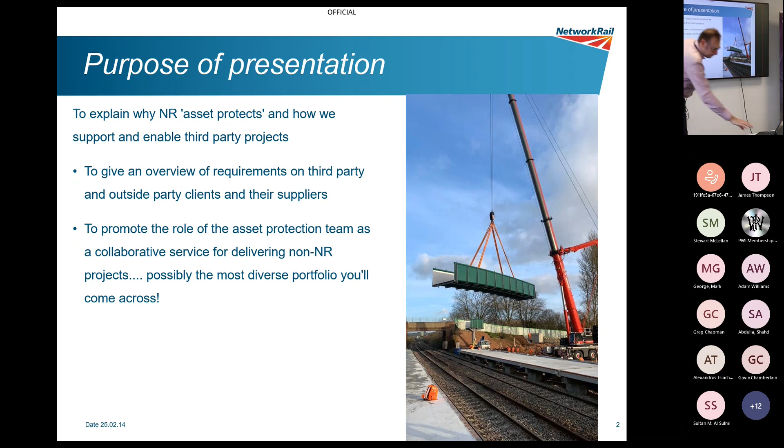So I've mentioned a couple of things already - outside parties and third parties. This gets a little bit confusing if you don't come back to some of the key principles. Outside party works are not railway projects. They're people who work alongside the railway - they're our neighbours, people who maybe want to put a bridge over the railway, a local authority, there might be somebody cutting trees down next to the railway. But the key thing is there is an impact on the railway. If anything they do goes wrong, there will be an impact on the railway - it will impact performance, potentially cause safety-related problems.

Third-party works, on the other hand, are about the creation of new railway assets or changing existing assets. Network Rail aren't delivering that work - we've got a third-party client who appoints a principal contractor, principal designer. They need to work with ASPRO to help them deliver that project, because ultimately it's our railway, we're the infrastructure manager. We need to allow them access to do the work. We need to ensure that whatever they do complies with standards, because at the end of that work it becomes a Network Rail asset, and then we're liable for maintenance, renewal, etc.

The other aspect of work the team do is managing land clearance activities. We'll touch on that in a bit, but essentially that's where Network Rail property is sold to developers to build adjacent to the railway.

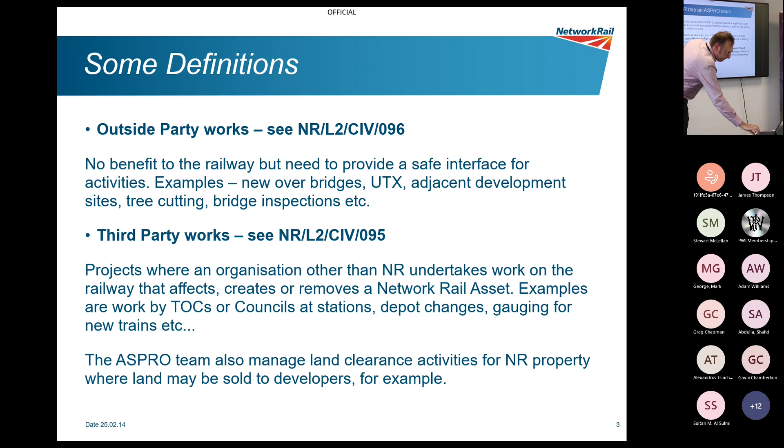So we do have legal obligations, which is why we're here - this is why ASPRO exists as a function. The Railways Act and Network Rail's licence places a legal duty on us to provide assurance that the railway is safe to use and to work within. So the Health and Safety at Work Act and CDM regs place obligations on us whenever we do construction work, and likewise, it places similar obligations on the outside parties and third parties.

And remember, the current issue of CDM regulations applies to domestic clients as well. So if you're extending your property up to the boundary of the railway, you are the client in the eyes of the law - and I don't think many clients would know that. I'm sure many of the small building companies don't realise they're a principal contractor. So that's by the by.

So asset protection, the asset is the rail infrastructure. It's valuable, millions, billions of pounds worth of assets out there. It's also a dangerous place to work. So we protect the infrastructure, things we know and love like track, signalling, electrification, etc. We're protecting the people that work on the infrastructure and the users of it, passengers, freight users, etc. And we protect the outside parties themselves. If somebody's working adjacent to the railway, we've got an obligation to make sure that they're safe.

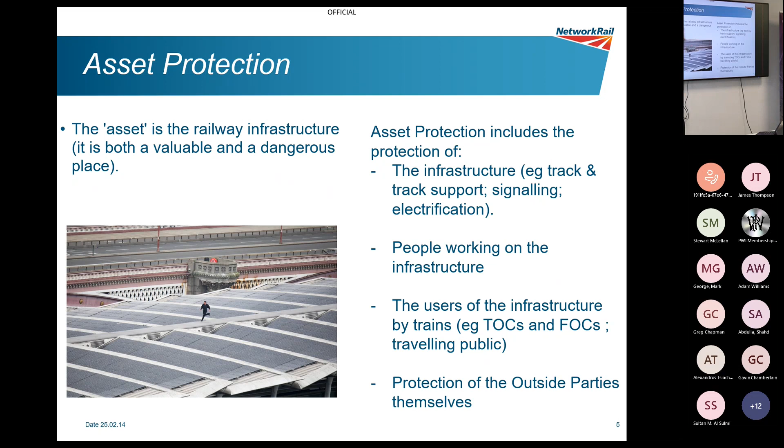Scope of ASPRO is wide and varied depending on what the project is, the complexity of it, what's been done to the infrastructure or what's been done around the infrastructure. There's a lot of words on there, I probably won't read them all. The thing you'll pick up from it is about understanding risk. That's probably priority one. What's the risks to the railway?

We assess those risks. In the case of outside parties, we help them with mitigating measures to prevent those risks from occurring. And we check the control measures are in place when they're actually doing the work. So we have safety supervision on site, maybe dropping in and out, maybe a permanent feature of the work. We work with the asset management team and other internal stakeholders, particularly on third-party works, where ultimately they become the owners of those changes to the railway.

And similar to our colleagues in capital delivery, we act as a DPE. We make sure there's system integration taking place. We check designers are coordinating their activities in the way that we would expect as Network Rail, so that the end product is as we would deliver, I guess, as a capital delivery team.

We do readiness reviews, so approaching major possessions, we'll sit with the various teams, do readiness reviews, T-8, T-4, etc., checking that they're ready to go for the possession they've got booked. And we provide protection staff to look after those sites when people are working on our infrastructure, making sure that whatever they've done is handed back safely at the possession.

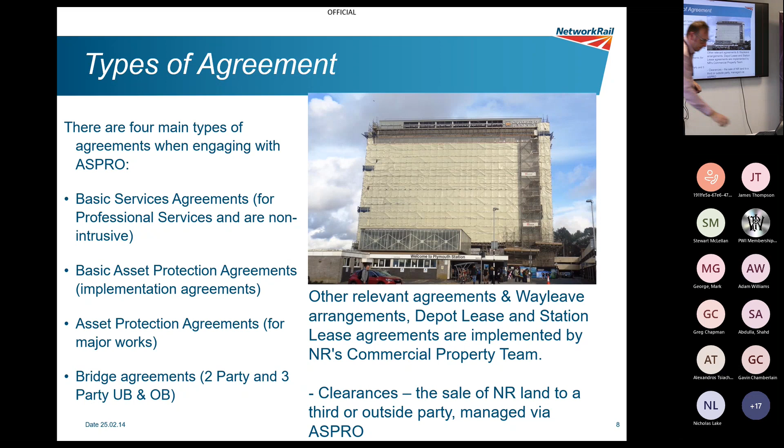The key thing with something like this - we've got other examples of piling rigs to look at in a minute - this might not be our land. The chances are it isn't if it's an outside party job. We don't know the condition of that ground, we don't know what they're sitting that crane on. So they need to demonstrate that they've made that as safe as possible. That could be ground investigation results proving the ground bearing capacity is enough to support this crane, or it could be we need to see some temporary works design so that they can create a pad for that crane to operate on. That's one quick example.

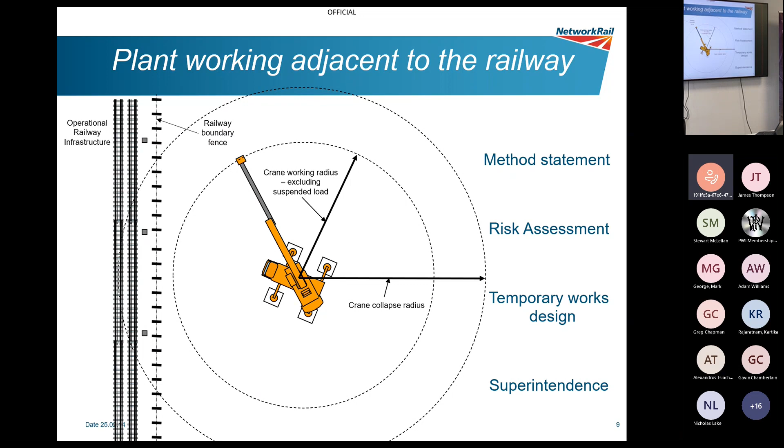So some considerations when we're using this kind of plant next to the railway: can the lift be undertaken within the collapse radius so that if it did collapse, it's not going to encroach on the railway? Can we put a slew restriction on the jib to prevent that same thing, basically making the piece of kit smaller? If you can, then great, we'll have a look at the working platform just to check that. If you can't do that, then maybe you need a possession to undertake those activities because the risk of that collapse onto the track just isn't tolerable.

And then method statements - how are you doing it, when are you doing it, what are the various crane positions that you need to be using to do that work. And that's all reviewed by our team before they're given the thumbs up to carry on. Big risk with outside party work is if they don't engage with us and we know absolutely nothing about it, and they're not taking any measures because they just haven't considered the railway.

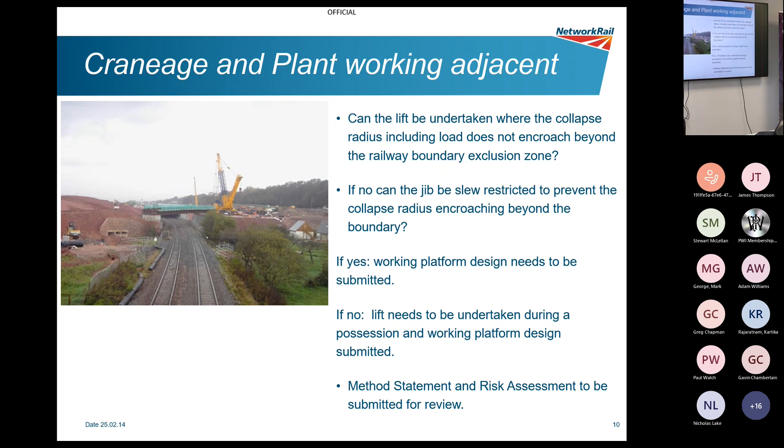That's a bigger risk because we won't know what's going on. We won't know where the risk areas are. We've got absolutely no control over any of that.

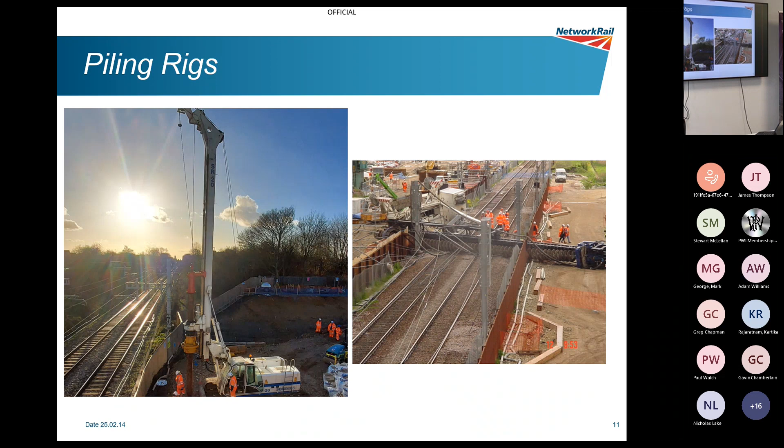Tower cranes, similar sort of risks. They're more of a permanent fixture, I would say, in a construction site. So even though they're temporary, they're probably there for a longer period than a mobile crane.

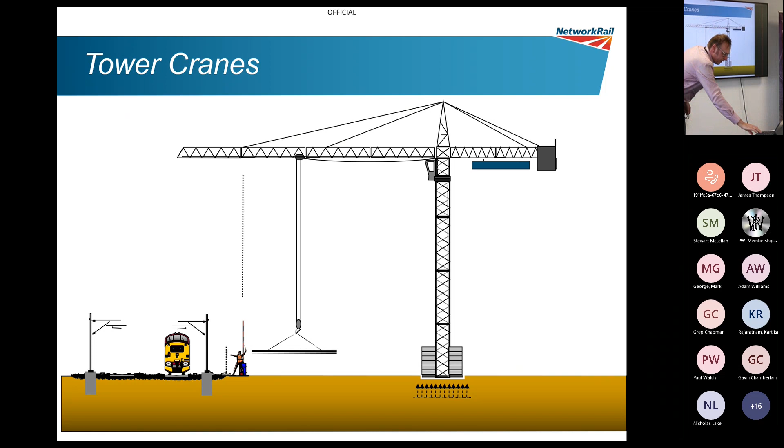Generally, moving heavy equipment higher, further. It could be a saddle crane. Still, we're considering the collapse radius, we're considering whether there's slew restrictions. Does that crane ever need to oversail the railway? There's something called a license for oversailing to manage that.

We've got a design check certificate for their foundations for this tower crane. It's semi-permanent work, so we call it. There will be a foundation design required for that. Do we need to downrate the crane to reduce the risk so it may be capable of lifting X tons? Do we say, actually, we want you to reduce that amount because we need to reduce the risk?

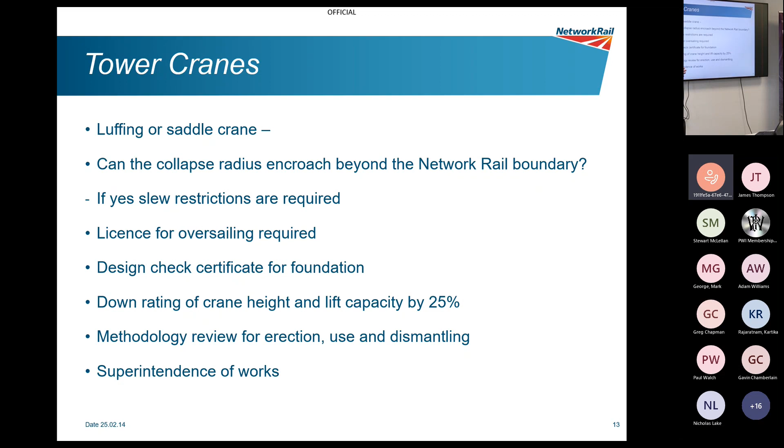We need to see how they're going to build it. Tower cranes, as you can imagine, take a while to put up. Do they need another crane to build that tower crane? We need to understand that methodology and how it's going to be dismantled. And how often do we need to be on site? Do we need permanent rail safety supervision, or are we happy to just keep it, once a week, watching brief?

Track support zone - so for most, you know, I'm a track engineer by trade, we know the track support zone. A lot of other disciplines now understand this, which is great. Especially when we were doing electrification on the main line, this was a big issue - people piling next to the track. How are we monitoring that track? How are we monitoring the settlement?

Crossrail down in London - I mean, there was a lot of monitoring took place when they were tunnelling in the Paddington station and the tracks around there. We've now got HS2, we've got Old Oak Common station being built, which I know Chris Ford spoke about a couple of weeks ago.

There's a hell of a lot of track monitoring required there. There are tunnels under our network. And in this example, you can see the work on the side, building the shaft, starts to interfere with the track support zone when it gets to a certain depth. And all of that design takes into account track support zone, it takes into account pile foundations for OLE, which could ultimately be affected by settlement as well.

But we had a recent example in Wales, where there's a construction site next to the railway. They want to do some dewatering, so they provided some figures, settlement figures. They basically think it's going to settle 15 mil. So, okay, where's the track monitoring plan? We'll monitor that and we'll react accordingly.

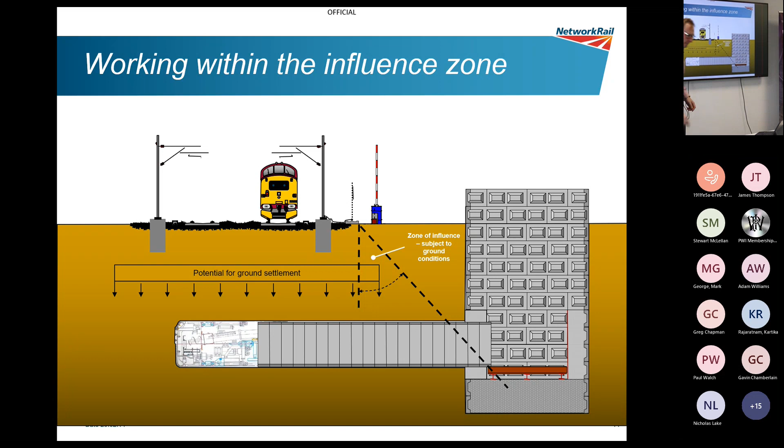Some typical examples: under track crossings, piling, retaining walls, excavations, tunnels. We need design submissions for all of those things. We need to know what they're doing under the railway. We need the settlement predictions, evidence of ground investigation, and on-call arrangements in place for when they're doing the work, so that if things start to shift, we've got a contingency plan.

The asset management plan, so all this is done through AMP, as we call it. And the track monitoring, you tailor that to the risk, depending on the expected movement.

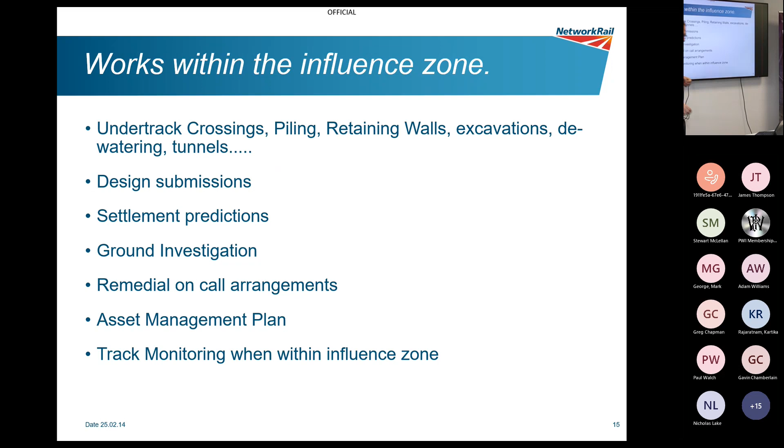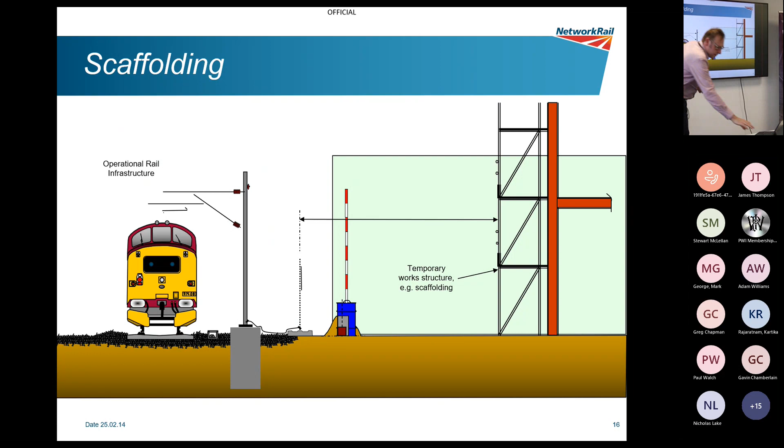That's another example of some scaffolding on the right-hand side. You can see how tight that is to the operational railway. So is it going to collapse beyond the boundary fence? It might be on the boundary fence. It might be within the boundary fence in some cases.

We need temporary works designs for those. We need to understand ground conditions again - what's the scaffold going to be sat on? The method statements, risk assessments, so that you get a picture of what kind of thing we're looking for. If you've got OLE, does that scaffold need bonding? I'm guessing that's something most scaffolders who work in the railway environment ask - what does that mean? What have we got to do?

They will need a license if they erect scaffold on Network Rail land, and they need to consider wind loading - some of these scaffolds are storeys high. We've got a new one started up at West Ealing station, where the scaffolding will be literally on the boundary wall, and it's an 8-storey building. So that's a job for the future.

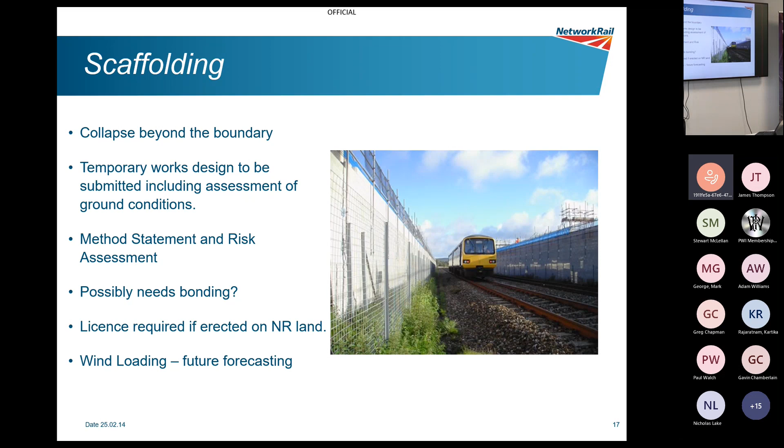Also growing at West Ealing. And then probably one of the rarer ones, I guess, unless we're talking about road bridges, where people are building over the railway. From an infrastructure perspective, we've obviously got to consider gauge clearance, electrical clearance, all of those sort of things.

But depending on the length of this, we may need to consider what does that do to access to our assets? I don't know whether any of you remember, there was a tunnel built with that kind of construction - I think they built a Tesco's on top of it, somewhere up north. That's creating a tunnel. Are there any critical assets in that area that we need to gain access to? S&C in there, for example. So those kind of considerations.

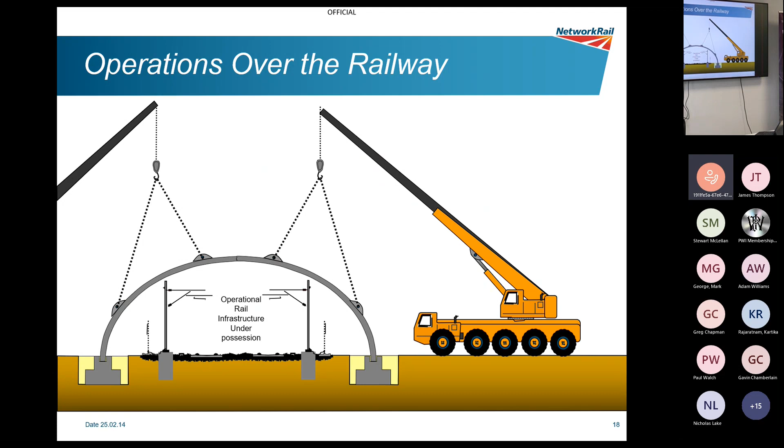So that kind of work, we need a bridge agreement. We need possession of the line, obviously, to install it. We would have people working on that - site supervision, isolations. So if you were trying to put this into context, if you were an outside party delivering that work, and you've got an estimate to build this bridge, say, and you've not factored in all the Network Rail programme requirements to get possessions, to get designs reviewed, to get acceptance from the asset management team to do this.

You've not considered the cost of engaging with Network Rail - you'll very quickly run out of money. I can't emphasise how important it is that at concept stage, people need to come to Network Rail and talk about what they want to do, because we can provide early input, we can give an early heads up and say, you need to include for this now, because it needs to be budgeted for, and you need to understand our timescales to which we work.

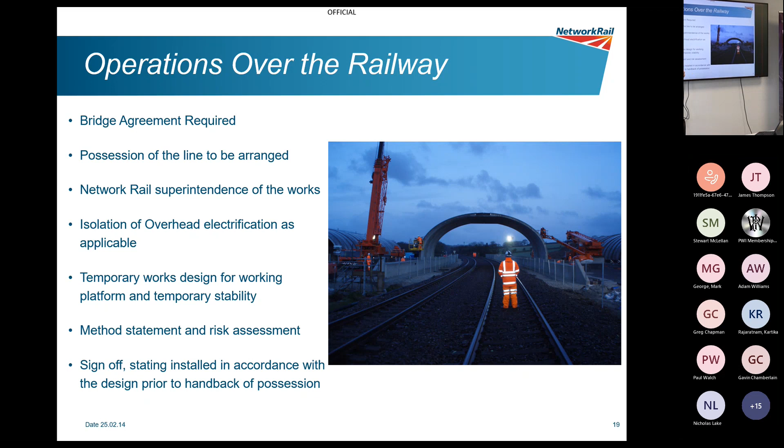Whether the work's temporary or permanent, the impact's the same, and I think that's the key. The difference is the permanent works should be permanent. The temporary works, you're dismantling, you're moving, you're changing all the time, which is why the methodology is so critical. We need to understand that methodology so that we can understand the risks at each stage of the construction.

Again, I don't know where that came from. I borrowed some pictures. Fortunately, we don't have many horrible pictures from recent times.

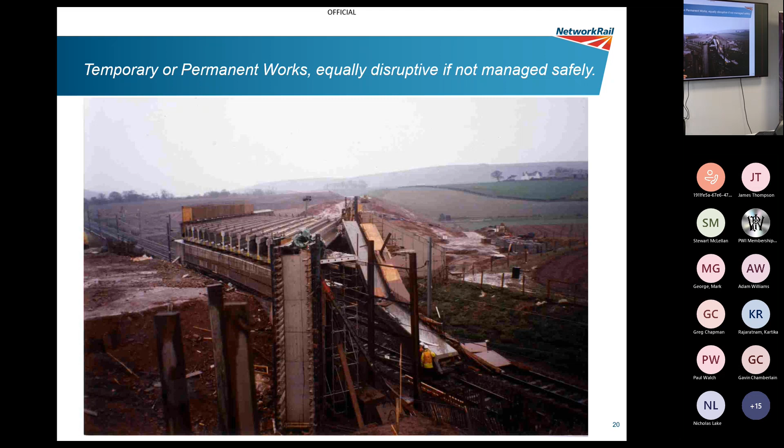The supporting structures, similar considerations again. We talked about Crossrail, tunnels, track settlement. We need full design submissions for whatever is designed to go under the track. Some of these assets may become Network Rail assets, not all of them do, some remain third-party assets. Having that upfront discussion is really important to decide that, because it sometimes changes how we approach things and how we assure things.

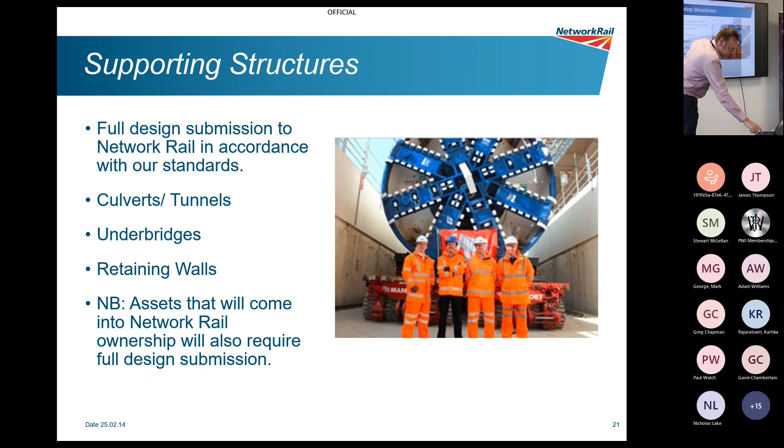Know your boundaries. So when you engage with ASPRO, if you're working alongside the track, we will agree where the safe limits of work are, so that effectively you can design out the need for ASPRO, if you're smart enough and find a way of segregating the works sufficiently so there's no interface with the railway.

This person had erected a Harris fencing, and the pile of dirt there has started falling in towards the infrastructure. So they decided to move the fence out the way to get it back. That's not safe. That machine could stray too close, and we've now got a fence there that's not secure.

So I think establishing your boundaries is really important. Understanding what your areas of work are, what you're safe to do in those areas, and whether you need to go outside them. It may be that you just need a little bit of ASPRO when you need to do certain activities, but being clear about that at the start is critical.

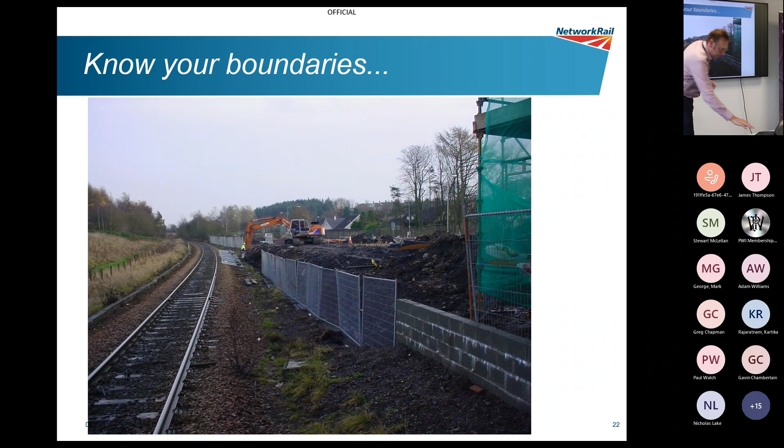It's one of my favourites - that's Morrison's in Gloucester. I don't know whether you know Gloucester, it's effectively a triangular bit of land between the railway. You've got the main line, Bristol to Birmingham, comes off to the South Wales main line, and then goes back out the other way towards Bristol, forming a triangle. That land was sold off, used to be all Network Rail land, sold off for development.

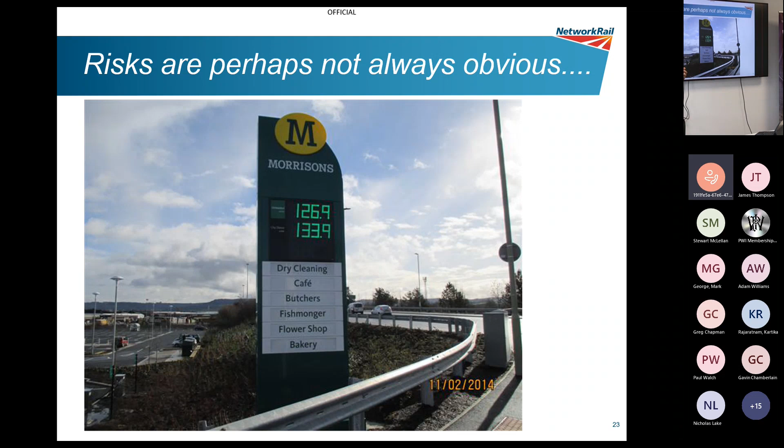Part of the development was to build a Morrison's with a petrol station. You'd look at its position in the middle of this triangle - it's not close to the railway, probably 400 to 500 metres away from the line, that sign. You'd think, well, what's the risk there? Doesn't seem any issue. But when you look at it from a train driver's perspective, the issue becomes a little more obvious. If this was dark or foggy or cloudy, that green Morrison sign gives a driver a false aspect, which could potentially lead to a SPAD.

It's not very often we get a picture like that, of something that really makes sense. People talk about these kinds of things all the time, signal sighting, but when you see real life examples, you think, wow, would I have picked that up? I'm not so sure. The outcome was that the petrol sign got changed to white LEDs, so it's no longer an issue. I guess you could have put a hoarding up or some sort of fence line to prevent the view, but yeah, that was quite an interesting one.

We talked a lot about outside parties, but third party work is probably more aligned to what I've done in other parts of my career. The outside party stuff is quite new to me, and I didn't realise how diverse it was. But the third party projects we see now are as big and complex as anything we deliver in Network Rail through capital delivery. A lot of you who work for Atkins or other consultants could get involved in these projects, and probably are.

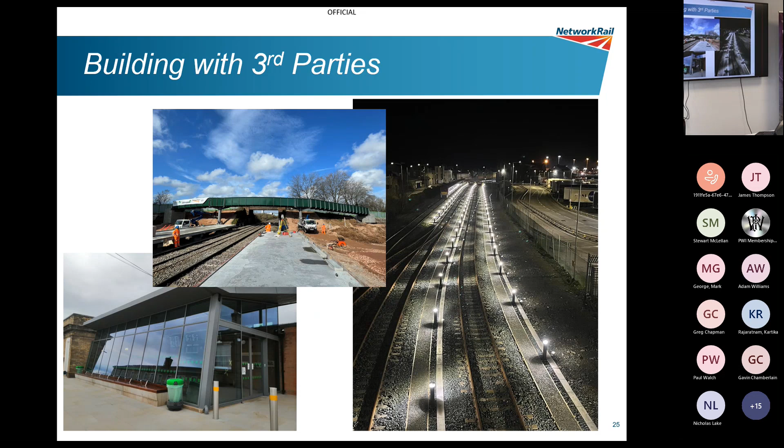Some other schemes - I'm just trying to give you a feel for the scope and the diversity of projects, really, that third parties are now delivering, not for Network Rail directly, but for their own interests - the creation of new Network Rail assets.

So this is a station upgrade. There's a whole car park facility with electric vehicle charging points, a new footbridge with lifts, fully accessible station. That's been funded by the local council. That's at Pontypool, the New Inn station in Wales.

Multi-storey car parks are interesting because you'd look at that and say, well, it's nowhere near the railway line, why do you need ASPRO to support that? Station car parks are part of our licence obligations as Network Rail. We have to provide a certain number of parking spaces, a certain number of accessible parking spaces, and I'm guessing now it includes a number of electric vehicle charging points as well. The car park has to be certain dimensions to allow certain types of vehicles into it.

So GWR were the client for this one. Network Rail and ASPRO would have had a part to play in the scoping of that and setting requirements for it, to ensure that when it is handed back to Network Rail as a Network Rail asset, it's compliant with our standards and we're happy to take it and maintain it.

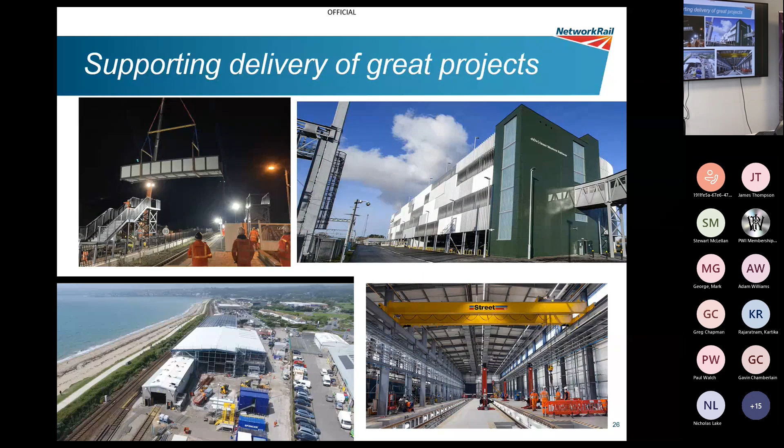Did I say about half an hour? We'll do that, Rick.

It's not my possession. So just to recap, really, there is just so much diversity of scope that comes to ASPRO, and I think it's a really exciting place to be because you get exposed to the kind of projects that aren't always done within the railway environment. So that's quite exciting. Key point, if you take one thing away: if you're ever working on third-party or outside-party jobs, engage Network Rail as early as possible.

Encourage your client to engage Network Rail as early as possible, because we understand the railway risks, and sometimes third parties don't. We know what's there, we've got so much information on our assets, and we know the condition of those assets, and we can share that with you or your client as pre-construction information, which helps plan and deliver the works.

We know how to access the railway. We can arrange possessions, we can arrange isolations, we can arrange whatever's needed to facilitate the work. And if you follow the procedures, Network Rail standards, etc., and we can work together, then we can help those schemes be delivered safe and ultimately get them handed back where they need to be handed back to Network Rail, or in the case of outside parties, they can open their new facilities for their public. I think that's all I've got to say.